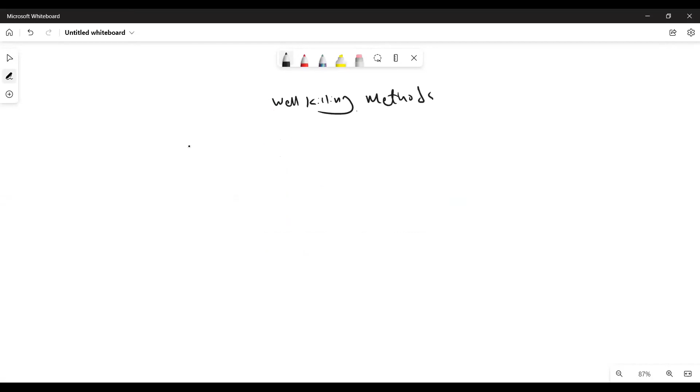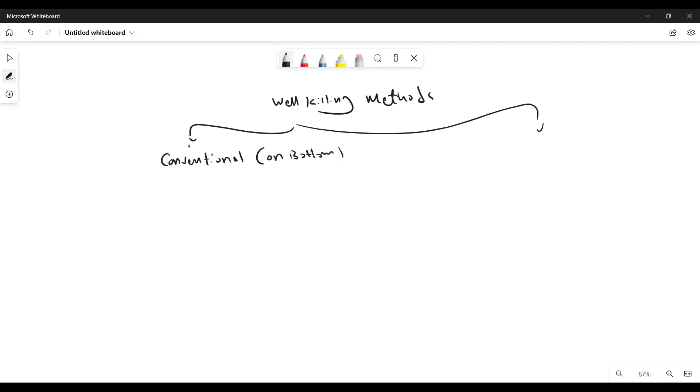Okay, so now guys, we're gonna talk about the well killing method or well control method. It's divided mainly into conventional or unconventional. Conventional means you are on bottom, and unconventional means you are off bottom.

Okay, so conventional methods like the driller method and wait and weight. And here unconventional, like the volumetric method.

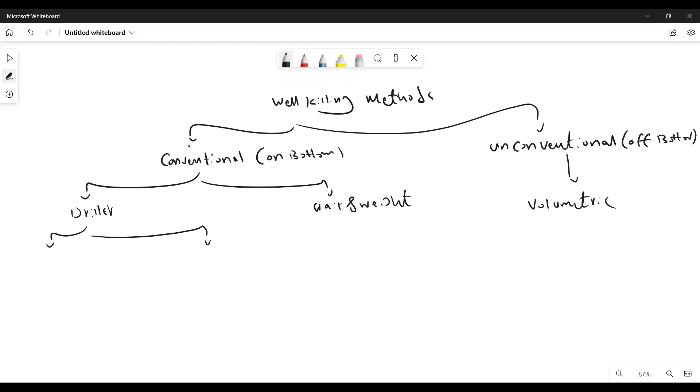So the driller method, guys, has 2 main circulations: first circulation, and second circulation. Here, wait and weight, only one single circulation. Okay, so let's talk in brief about them. For the driller method, first circulation, this one.

We have our well like this, with drill pipe, and the well is filled with original mud weight. While drilling, we have a kick. So we shut in our well and we need to start killing the well using the driller method.

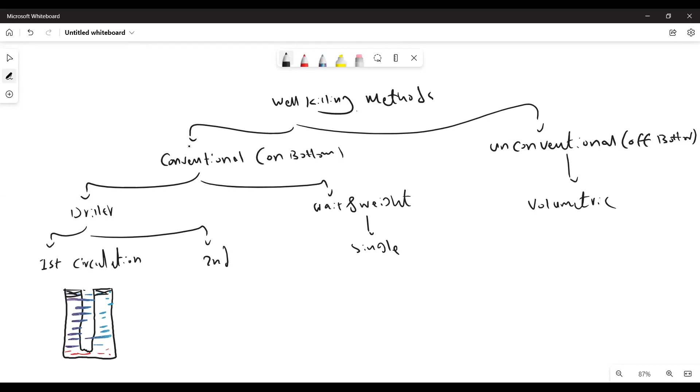Starting with the first circulation. The purpose of the first circulation of the driller method is to make displacement for this influx, pushing it out from the well by pumping original mud weight.

Once the influx is out from the well, and the well is completely filled with the original mud weight, we have successfully conducted the first circulation of the driller method.

Briefly for the second circulation: now we have our well like this, drill pipe, the well is closed, and once we conduct the first circulation, the well is completely filled with the original mud weight, no influx inside. So to kill the well, we need to pump kill mud weight. Let's go ahead and start pumping kill mud weight inside the well.

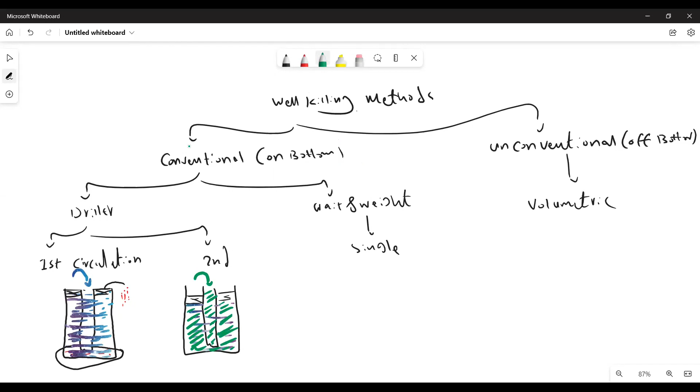Once the kill mud fills the well, making displacement for the original mud weight, the second circulation has been finished, and you're going to check for pressure.

You're going to find shut-in drill pipe pressure equals shut-in casing pressure equals zero. Here, once we finish the first circulation, we find shut-in drill pipe pressure equals shut-in casing pressure equals the original value of shut-in drill pipe pressure.

So again, the first circulation's purpose is to make displacement for the influx out from the well by pumping the original mud weight. Once finished successfully, we find shut-in drill pipe pressure equals shut-in casing pressure equals the original value of shut-in drill pipe pressure.

For the second circulation, you pump kill mud weight, making displacement for the original mud weight. Once the well is completely filled with the kill mud, you check for pressure: shut-in drill pipe pressure equals shut-in casing pressure equals zero.

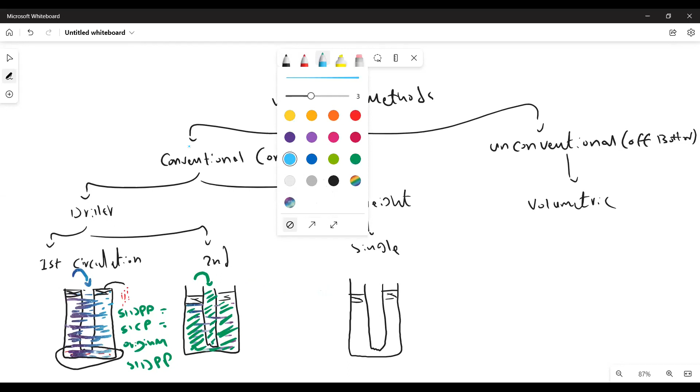So what about the wait and weight method? Now we have our well like this, drill pipe, the well is closed, the well was filled with the original mud weight like this, and we have some influx inside the well.

The purpose of the wait and weight method is to pump kill mud weight at one single circulation, making displacement for the influx and displacement for the original mud weight at the same time. Only one single circulation, not two like driller, and now your well is killed.

But with driller, you first need to displace the influx out from the well, then kill the well by pumping kill mud weight. With wait and weight, in one single circulation, you pump kill mud, making displacement for the influx and displacement for the original mud weight.

For the volumetric method, you are off bottom or have no pipe inside the well. For example, like this, no pipe inside the well. You close the BOP. You have influx inside the well like this, and here is your original mud weight.

The sequence or mechanism of the volumetric method is not included in our course, but we're going to discuss it briefly. The purpose is to allow this influx to reach the surface by a mechanism: allow it to expand by bleeding some mud, then allow it to expand, bleeding some mud again, repeating these steps while keeping bottom hole pressure.

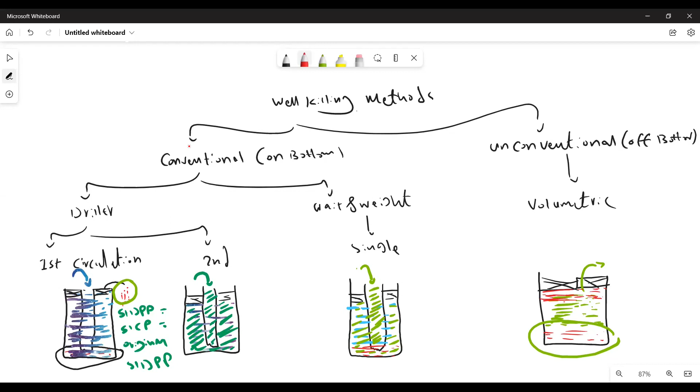Once the influx or gas reaches the surface, the volumetric method has been completed, and we're going to start the lubricate and bleed method, as we'll see later in our presentation. Now let's go ahead and talk in detail about our well control methods.

So here is our well, starting with the driller method, first circulation. Here is our well, like this, with drill pipe.

Here is our drill pipe. The well is closed. The well was filled with original mud, like this, while having some influx inside the well, like this.

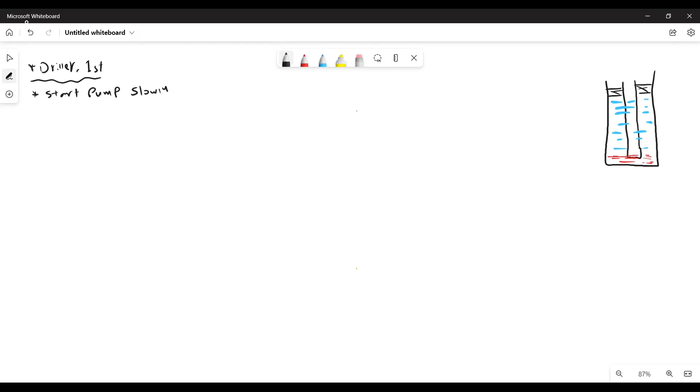Okay, so let's start with the driller method. First thing here is start pump slowly, 5 SPM by 5 SPM, while holding.

Okay, let's start pump slowly 5 SPM by 5 SPM till reaching kill rate, for example 30 SPM, while holding casing pressure constant. That's called correct startup procedure.

Okay, so anytime you need to start your killing operation, you need to run pump slowly 5 by 5 till reaching kill rate, okay, while holding casing pressure constant.

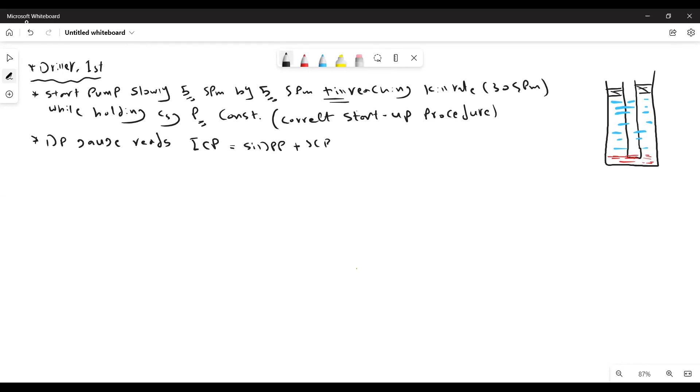Okay, so now once reaching kill rate 30 SPM, drill pipe gauge reads ICP value, equal shut-in drill pipe pressure plus SCR pressure. So now here, once reaching kill rate, now drill pipe gauge reads ICP value. Okay, so let's have a look now.

On the two sides, we have drill pipe side and we have annulus side. Drill pipe side has only one fluid, the original mud, but annulus side has two fluids, influx and original mud. So all the time we need to keep the one phase fluid pressure constant.

So now after drill pipe gauge reads ICP, let's continue pumping original mud, holding drill pipe pressure constant at ICP till the influx is out from the well. So we're gonna pump original mud weight till the influx is completely out from the well, and now the well is completely filled with the original mud.

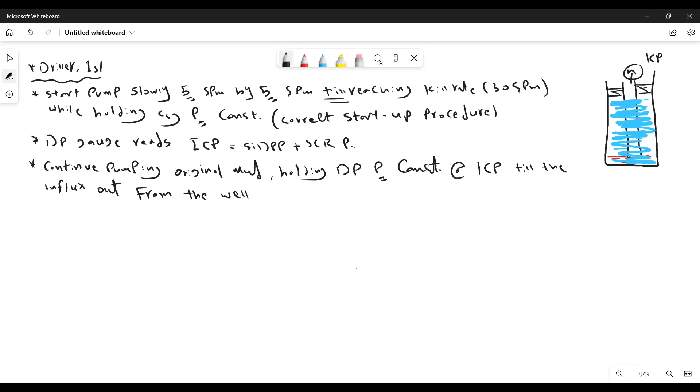No, I thought that the pump pressure should equal the casing shut-in pressure plus the SCR pressure. Again, what do you want? I thought that the pump pressure reads the previous shut-in drill pipe pressure plus... No, the SCR pressure. ICP equals shut-in drill pipe pressure plus SCR pressure. So what is the problem? We just calculated it in our kill sheet, right? Yeah, okay, so you have a problem with this calculation?

No. Okay, so here once reaching kill rate, for example 30 SPM, okay, drill pipe gauge will reach ICP value, shut-in drill pipe pressure plus SCR pressure or pump pressure, okay? Okay, or not complete?

Okay, then continue pumping the original mud, holding drill pipe pressure constant at ICP till influx is out from the well. Now shut down, pump slowly, 5 SPM by 5 SPM, while closing choke completely.

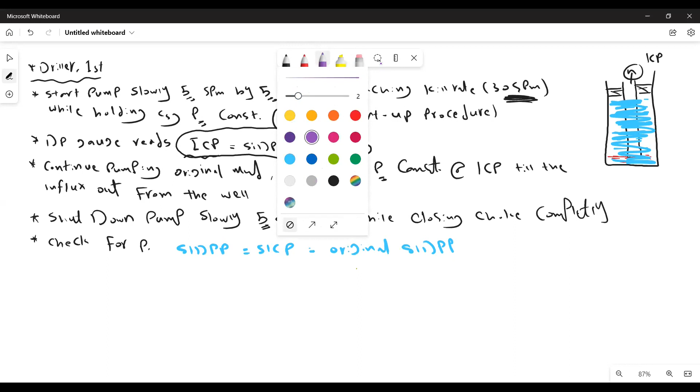So for example, if we have from the beginning shut-in drill pipe pressure is 350, shut-in casing pressure equal 400. So after conducting successfully the driller method circulation, we're gonna find shut-in drill pipe pressure equal shut-in casing pressure equal 350. Okay, so what will happen if we found shut-in drill pipe equal shut-in casing, but instead of 350 equal 450? What is the problem, guys? So we are over 100. Yes, say over. Yeah, so we may have something called trapped pressure.

Trapped pressure. So how to check for trapped pressure? Start bleeding, bleeding 50 psi. If no pressure build up, so that's trapped pressure. If there is pressure build up again to 450 and more, so there is influx inside the well - secondary influx or further influx.

Okay, so what will happen if we found shut-in drill pipe pressure, for example, equal 370, and shut-in casing pressure equal 430? So what is the problem? We still have another influx. Yes, okay, so now let's go ahead with the driller method second circulation.

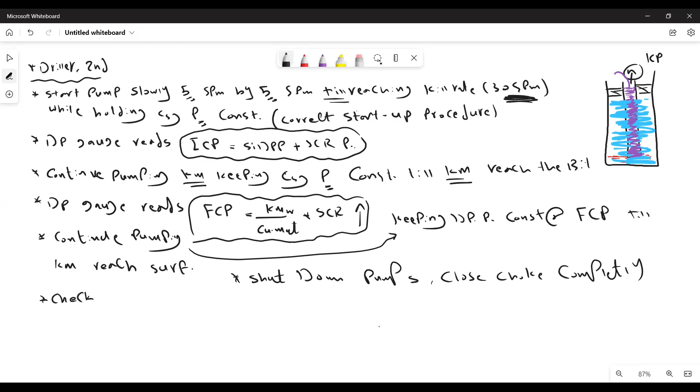Okay, close the choke completely. And the last thing is to check for pressure. After successfully conducting that, you're gonna find shut-in drill pipe pressure equal shut-in casing pressure equal 0.

Same thing if we found shut-in drill pipe equal shut-in casing, but instead of 0, 100 - so we may have trapped pressure. How to check for trapped pressure? By bleeding 50 psi. If bleeding 50 psi and no pressure build up, it's okay, it's trapped pressure. If pressure builds up again, the kill mud may not be sufficient enough.

Another case: if we found shut-in drill pipe pressure equal 0, but shut-in casing pressure equal a value, for example 70 psi, this means that the kill mud is not reaching the surface yet.

So this area still has original mud, and this causes a back pressure on the casing pressure. Once shut-in drill pipe is 0, this means kill mud already filled the drill pipe, but casing pressure has a value, meaning kill mud didn't reach the surface yet.

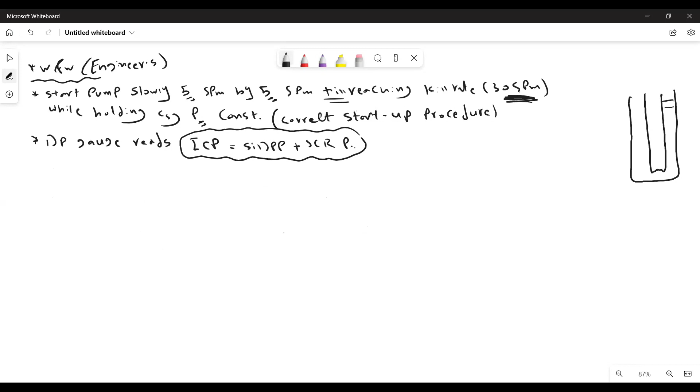Okay, so here is our well, the drill pipe. The well is closed. The well is lined up to the mud pump. The well was filled with original mud, like this,

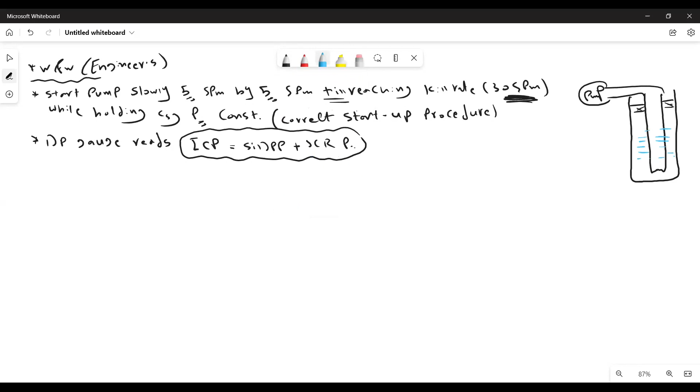while having some influx inside the well. So as mentioned, the wait and weight method is to make displacement for the original mud and for the influx at one single circulation. So here, to start the wait and weight method, same thing.

Start pump slowly, 5 SPM by 5 SPM, until reaching kill rate 30 SPM, for example, while holding casing pressure constant. This is called correct startup procedure. Once reaching kill rate, drill pipe gauge reads the ICP value.

Okay, so now here we're pumping kill mud inside the pipe. Once reaching kill rate, the drill pipe gauge reads ICP value. What else?

Once the surface line volume has been pumped, make 0 strokes - zero the stroke count. So once we pump the capacity of the surface line volume, we need to zero the strokes. Why? Because we're gonna follow the step down table. You're gonna see now.

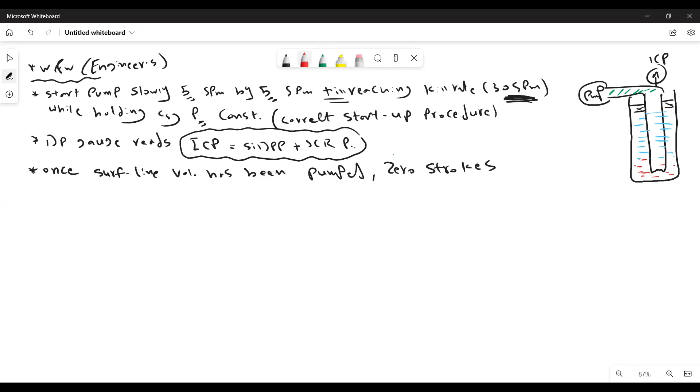Okay, so now we have some basic calculations you already know, let's mention them again. ICP equals shut-in drill pipe pressure plus SCR pressure. FCP equals kill mud weight over current mud weight times SCR pressure, and round up. And we have delta P, pressure drop per 100 strokes, equals ICP minus FCP over drill string volume in strokes, times 100, and round up.

Okay, so let's say our ICP is about 900, and our FCP is about 400, and our drill string volume is 800 strokes. So now, guys, after making this calculation, you're gonna have a look at the two sides, drill pipe side and annulus side. The annulus side has two fluids, influx and original mud. The drill pipe side has two fluids, kill mud just entering the well and original mud. So no single phase fluid - we can't keep pressure constant.

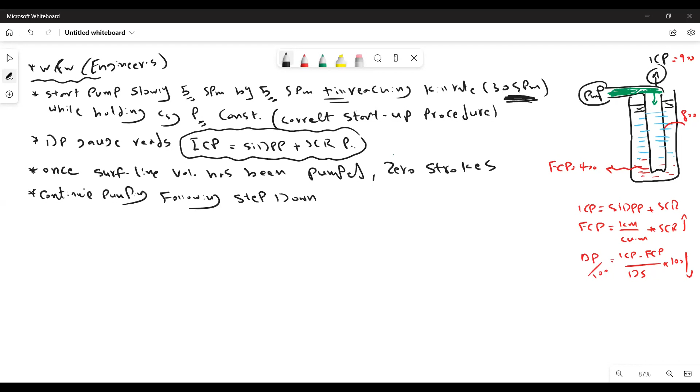So here we need to, as a second step, continue pumping following the step down table or step down graph - the step down table, or drill pipe pressure schedule, step down schedule, following the step down table for drill pipe pressure.

Okay, so let's make our calculation for delta P. Let's say our delta P, without calculating, is 50 psi after round up. Okay, so now let's make our step down table. Here is the number of strokes.

And here is drill pipe pressure. The number of strokes we're having here: 0 stroke, 100, 200, 300, till reaching the full capacity of the drill string, 800 strokes. We make 0 strokes once pumping the surface line capacity, and we have the pressure ICP on the drill pipe gauge. At 0 stroke, we have ICP value, let's say equal to 900 PSI.

By pumping 100 strokes, the pressure dropped by 50 PSI per 100 strokes. After pumping 100, it's 850. Then another 100, it's 800. Another 100, 750, till pumping the whole capacity of the drill string. So at 800 strokes, once the kill mud reaches the bit, we're having FCP value equal to 400 PSI. That's called the step down table or step down graph.

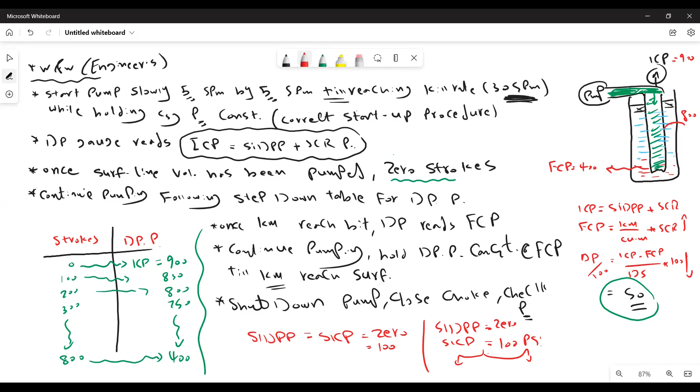Is it due to hole geometry or open volume? No, we may not have made re-zero for the stroke counter. If we ignore re-zeroing the stroke counter, or if we don't take the surface line volume into our calculation, at 0 stroke you have ICP. Once pumping the first 100 strokes, the surface line volume, say the surface line volume is 100 strokes, so after pumping 100 strokes you're going to keep 850. After 200 strokes, 800.

So here you didn't take the 100 strokes of surface line volume into your calculation. So after pumping the total calculated volume, the kill mud will reach this specific point, but still here, 100 strokes didn't reach the surface before reaching the surface. Where does this 100 strokes come from? Because you're pumping the surface line volume and didn't zero the stroke counter.

This one you can control. But if the well has washout or something, this one you cannot control. Also, maybe you have more annular volume if you have an error in your calculation or washout in the formation, yes. But you can control the situation.

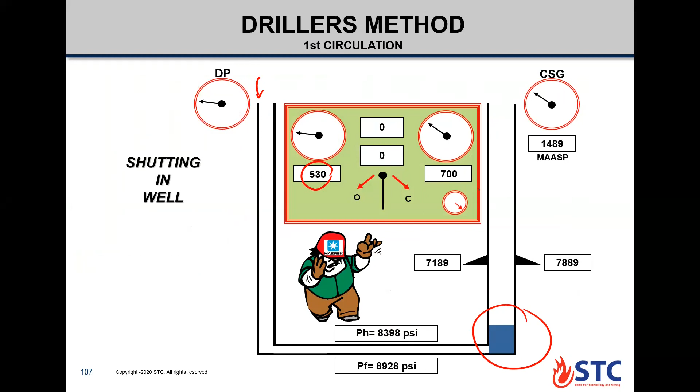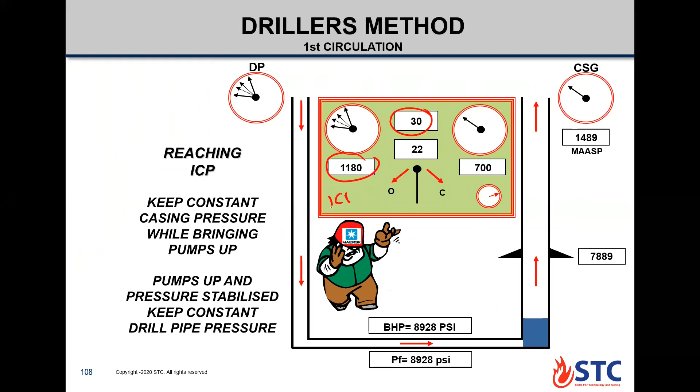Starting with shut-in drill pipe 530, shut-in casing about 700 psi. So here, going to pump. First thing, reaching 30 SPM, so drill pipe gauge reads ICP value. Keep pumping the original mud weight, making the displacement for the influx. If you look here, the casing shut-in pressure will be maximum when the top of the influx reaches here.

So here, once the influx reaches the top, maximum casing shut-in pressure. We're going to complete pumping, keeping the drill pipe pressure constant at ICP, till the influx is now at the top. Now the influx is out, keeping ICP value. Once the influx is out of the well, casing pressure will equal the original shut-in drill pipe pressure. Once we shut down the pump, shut-in drill pipe pressure shut down equals shut-in casing pressure, both equal to 530, the original value of shut-in drill pipe.

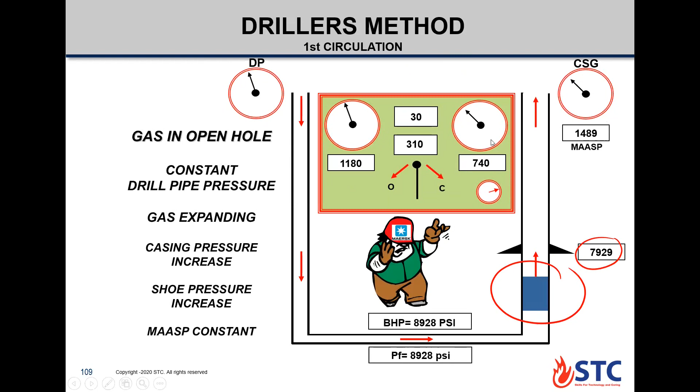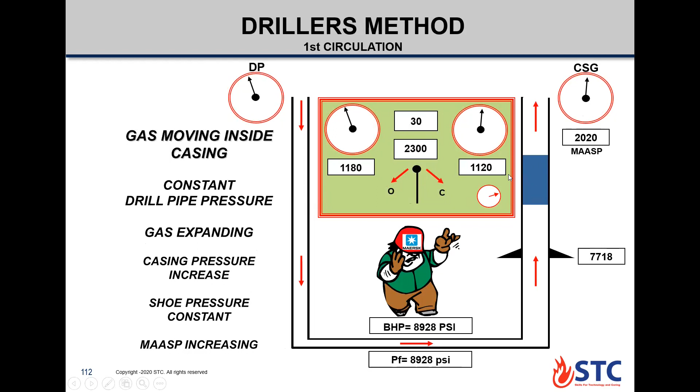But look here, once we are in the open hole, our eyes are on the MAASP, not to allow casing pressure to reach the MAASP, not to fracture the formation. Once you are inside the casing string, so it's okay, no fracturing of the formation.

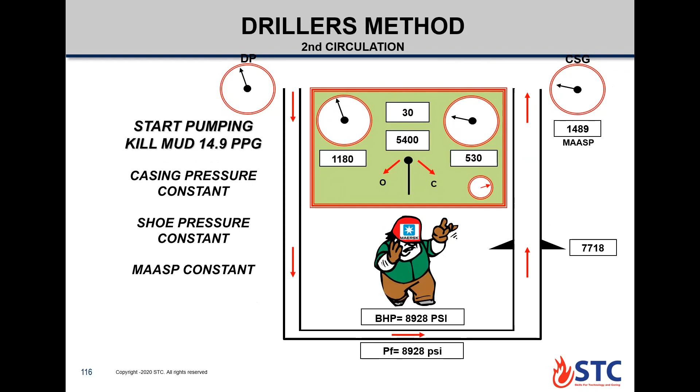Now to talk about the second circulation of the driller method. Look here, the well is completely filled with the original mud. The pump is running at rate, so here we have ICP. Now we're going to pump kill mud. We have two fluids here in the drill pipe, so we need to keep casing pressure constant at 530 till kill mud reaches the bit.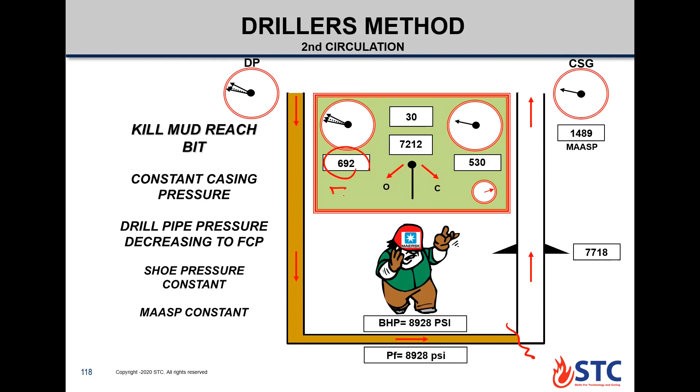Now kill mud reaches the bit, so drill pipe gauge reads FCP value. We need to keep FCP value constant till kill mud reaches the surface. Once kill mud reaches the surface, casing pressure equals 0. Once we shut down the pump, drill pipe pressure also equals 0.

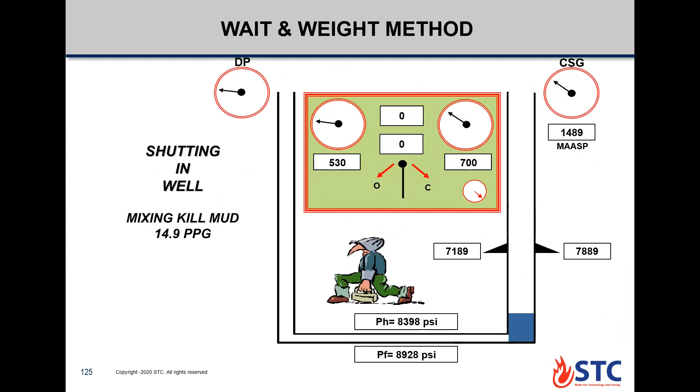So coming to talk about wait and weight method. Here we have influx inside the well. So two fluids here, and the drill pipe, once we pump kill mud, we have two fluids. So no one phase side to keep its pressure constant. So we're gonna follow a pressure schedule, step down pressure schedule.

Once pumping kill mud, drill pipe pressure will decrease till reaching the final circulating pressure, 692. Look here, drill pipe pressure decreases till kill mud reaches the bit. Now we having the FCP value, so we're gonna keep the FCP value constant on the drill pipe gauge till kill mud reaching to the surface.

And same thing, as long as the influx is in the open hole, we need to keep our eyes focused on the casing pressure, not to reach the max and fracture the formation. Now kill mud reaching the surface, so casing pressure equals 0. And once you shut down the pump, you're gonna find your drill pipe gauge equal 0 also.

So during killing the well, guys, and circulating the influx out from the well, we may face some challenges or problems, like choke washout, choke plugging, hole in the string, loss circulation, nozzle blown out, nozzle plug, or pump failure. So your first action, if you face any of these problems, is to secure the well, shut in the well, evaluate or assess the situation, then take proper action.

So let's know how to identify these problems. First thing, if we have choke washout, you're gonna find sudden decrease in casing pressure, then following after a lag time, drill pipe pressure decreases. So how much is the lagging time between the change in casing and drill pipe?

If we have our well like this, and the choke is here, so once you open or close the choke, the casing pressure immediately changes. Immediate change, okay? Then drill pipe gauge has a lagging time. After some time, drill pipe shows the same change, okay? So what is the lag time?

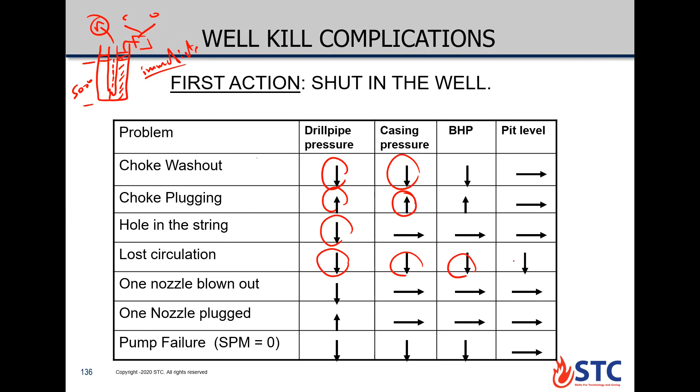Okay, if we have a choke plugging, we're gonna find a sudden jump or sudden increase in casing pressure, then after lag time followed by drill pipe pressure increase. If we have hole in the string, only drill pipe pressure is affected, it decreases, and all other parameters stay the same. If lost circulation, you're gonna notice drill pipe pressure decrease, casing decrease, bottom hole pressure decrease, and pit level also decrease. This one identifies lost circulation.

Sorry, what does it mean, hole in string? Washout in the string, hole in string. Washout. Okay, yeah.

Then if we have a nozzle blown out, your drill pipe pressure decreases, but casing not changed, bottom hole pressure not changed, and pit level also not changed. If we have nozzle plugged, sudden jump in drill pipe pressure, all other parameters stay constant. If we have pump failure, you're gonna find your SPM is 0, pump rate is 0, then drill pipe pressure decreases, casing decreases, bottom hole decreases, but pit level stays the same.

Okay, sorry, about the washout, if we have washout, washout in choke or pipe? Washout in the pipe. Okay. So the bottom hole pressure will decrease, eh? Decrease? No, not affected, only drill pipe pressure decreases. No, because the friction loss, we now have different friction loss.

Friction loss in the annulus or the drill pipe? In the annulus and in the drill pipe, both. Yes, but not affected too much. Not affected too much due to partial washout in the drill pipe.

Okay, so now to talk about the volumetric method. The volumetric method is not involved in our course in details. It requires some time, much time, to conduct it successfully.

First, let's talk about the cases where we use the volumetric method. If our pipe is off bottom, or if we can't make circulation - for example, the drill string is plugged, or the bit is completely plugged, or the drill string is completely out from the well, washout in the drill string, or cut in the drill string. The drill string has been cut and left in the hole, so we need to remove the gas first, then start fishing operation. Or if we have equipment failure like pumps or motors.

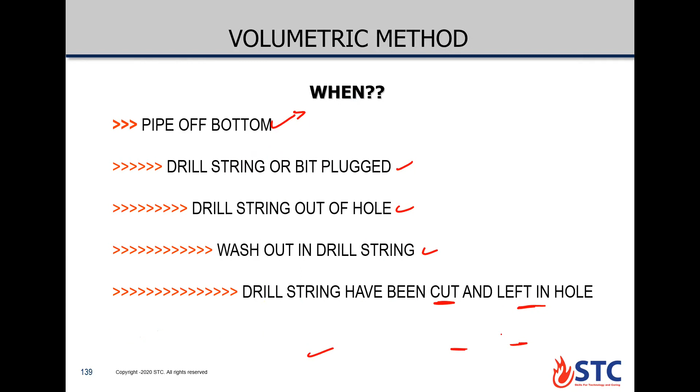So what is the volumetric method itself? If we are off bottom or we have plugging and we can't get the influx and circulate it out, that's the situation to use the volumetric method. The volumetric method is to allow gas to expand till reaching the surface by bleeding an amount of mud from the choke, while holding bottom hole pressure constant.

So the first thing you're going to do is allow the gas to migrate. You have now 100 psi additional - keep it as a safety margin, then allow another 100 psi as a working margin. Then you start bleeding an amount of the mud.

So now gas expands and casing pressure starts to increase. Then you bleed another amount of mud, and casing pressure starts to increase again. You keep making this operation more and more until the gas reaches the surface. This volumetric method takes much time to be conducted successfully.

You need to keep bottom hole pressure constant, or nearly constant, all the time, by controlling drill pipe pressure if it exists. Casing pressure is allowed to increase to compensate for the mud bled. Once you bleed mud, casing pressure starts to increase to keep your bottom hole pressure constant. So casing pressure is allowed to increase to compensate for mud bled from the well, until gas is at the surface.

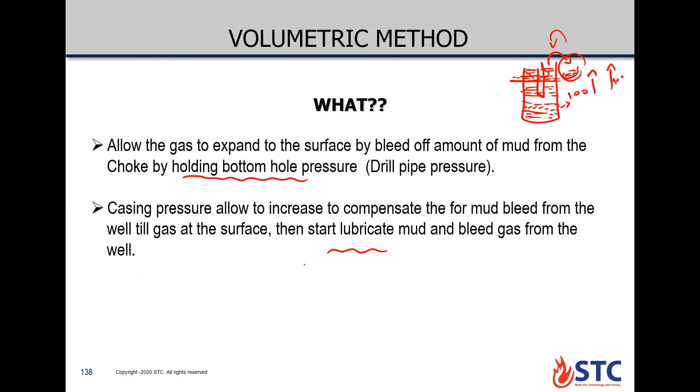Then we're going to start the lubricate and bleed method. So what about the lubricate and bleed method? Here we have no pipe inside the well, and we allow the gas to reach the surface. Lubricate and bleed is a closed loop, or a closed system. We bleed some gas from the choke, and at the same time we pump kill mud.

The same sequence we make in the volumetric method: bleeding 100 psi equivalent of mud volume, and letting the casing pressure increase by 100 psi, repeating this step more times until the gas reaches the surface. Here it's vice versa - start pumping kill mud inside the well, allowing the bottom hole pressure to have 100 additional psi, then remove gas equivalent to this 100 psi.

Then put another 100 psi of kill mud inside the well, then make the removal again. Repeat this step more and more until the influx is completely out from the well and the well is killed - kill mud now completely fills the well.

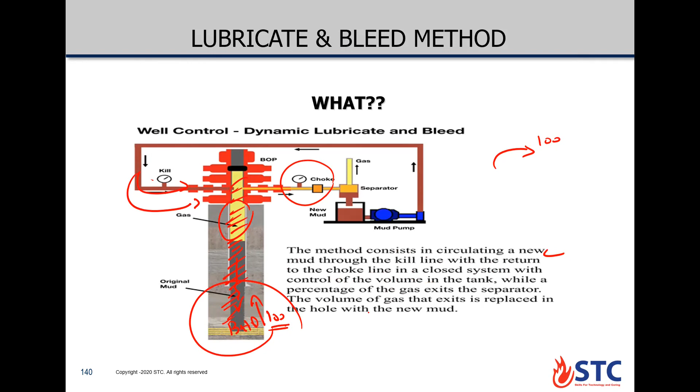This method consists of circulating new mud through the kill line with return to the choke line in a closed system, with control of the volume of the tank while a percentage of gas exits the separator. The volume of gas that exits is replaced in the hole with new kill mud.

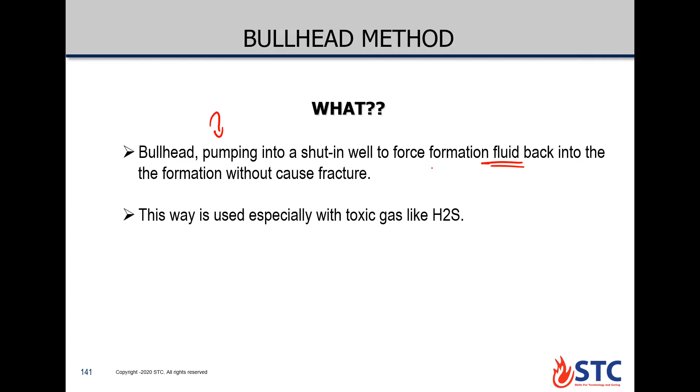There is another method called the bullhead method, used for well intervention jobs, especially if there is toxic gas like H2S. Bullheading is pumping into a shut-in well to force formation fluids back again into the formation without causing any fracturing. This way is used especially with toxic gas like H2S.

For stripping operation - if, for example, we are pulling out of the well and we have an influx, we need to make a stripping operation to get below the influx to circulate it out from the well. So stripping operation is running the pipe into a shut-in well to get the drill string below the influx and circulate it out.

So how do we make a stripping operation? First, for example, if we are pulling out of the well and we have influx, as mentioned earlier, we have a flow, so we need to install the drill pipe safety valve or full opening safety valve in open position, then close it by a wrench. Now the safety valve, or full opening safety valve, is closed. Then install the IBOP in open position.

Then remove the screw, the locking screw. So now the IBOP in closed position. Full opening safety valve in closed position. Back again, and open the safety valve. So now the lineup: IBOP in closed position, drill pipe safety valve in open position.

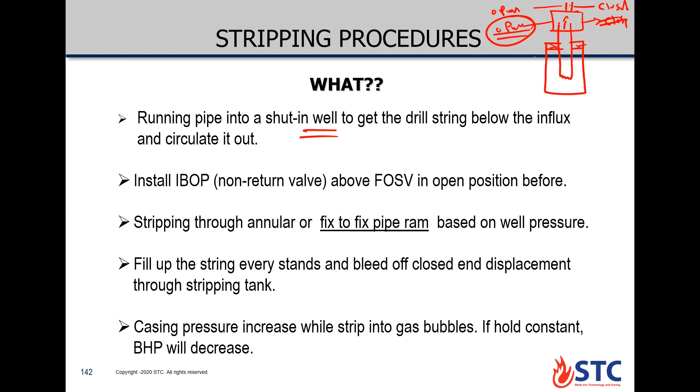Then we can go ahead and make our stripping operation. Stripping operation can only be conducted from annular to fixed RAM, or from fixed RAM to fixed RAM, but we cannot make it from variable RAM.

So if our BOP stack has annular, then variable, then shear blind, then fixed RAM, we can only make stripping from annular to fixed, not from variable to fixed. If we have fixed, we have two options: from fixed RAM to fixed RAM, or from annular to fixed RAM.

While doing the stripping operation, you need to fill the string every stand and bleed off closed-end displacement as you run in the well. So fill up from the surface every stand and bleed off closed-end displacement.

If we have some gas or influx here with height h small, once you strip into this influx, its height will increase. So once the height increases, the reduction in hydrostatic pressure will increase, and the casing pressure will be allowed to increase while stripping into the gas bubble.

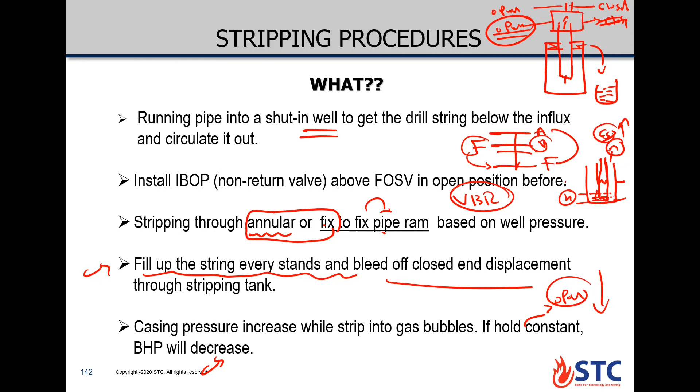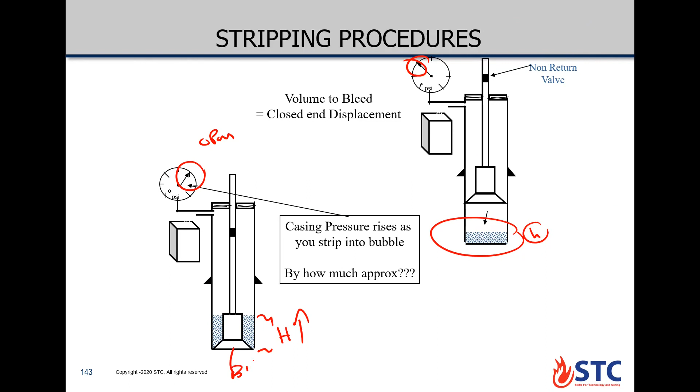If you keep it constant, meaning you open the choke to decrease the casing pressure back to the original value, then bottom hole pressure will decrease. Once you strip into a gas bubble with small height h, once stripping, the height of the influx gets larger, so casing pressure increases. If you keep it constant to this value, you open the choke, which means you make a reduction in bottom hole pressure, so you're going to have further influx.

Now to talk about formation ballooning. If you look at this figure, once the pump is on, we have an APL effect, so you may apply more overbalance, and some fluids will go into the pore space. Your bottom hole pressure is now slightly greater than the induced fracture pressure. Once your pump is off, formation fluids will come back again as we lose the effect of APL.

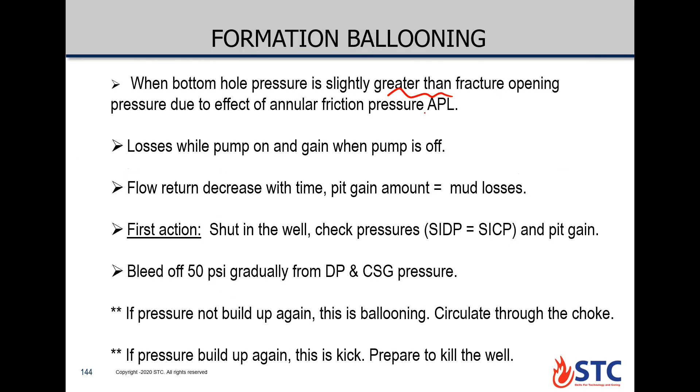So let's go back again here. When bottom hole pressure is slightly greater than the fracture opening pressure due to the effect of annular pressure loss, APL: losses occur while pump is on, and gain occurs when pump is off. Returns decrease with time, and pit gain amount equals mud loss. So the first action is to shut in the well and check pressure.

You're going to find shut-in drill pipe equals shut-in casing pressure, so you need to bleed 50 by 50 from drill pipe and casing. If there is no pressure build-up, that's ballooning, and you need to circulate bottom up through the choke, in case a small amount of gas needs to come out without reducing hydrostatic pressure. If there is pressure build-up again, that's a kick, and you need to prepare to kill the well. That's formation ballooning.

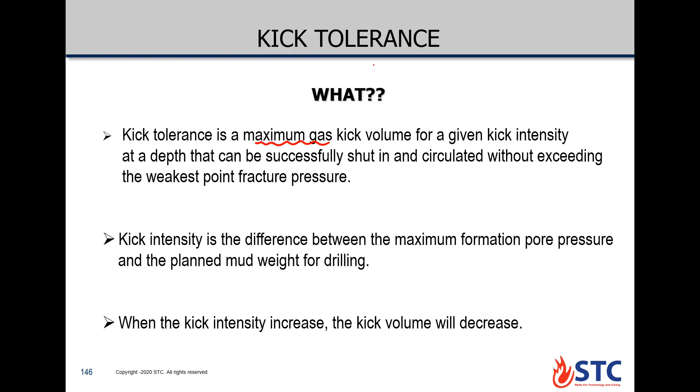Now to talk about something called kick tolerance. What is kick tolerance? Simply, kick tolerance is the maximum amount of gas, the maximum volume of kick, you can successfully take as a kick and circulate it out from the well without fracturing the formation at the weak spot.

Kick tolerance is the maximum volume of a kick for a given kick intensity at a given depth that can be successfully shut in and circulated without exceeding the weakest point fracture pressure. So what is kick intensity? Kick intensity is the difference between the maximum pore pressure and the planned mud weight.

For example, if our formation pressure is equivalent to, let's say, 10 ppg, we're going to use hydrostatic pressure equivalent to, let's say, 11 ppg. The maximum expected pore pressure, or the abnormal pore pressure we may face, is about, let's say, 14 ppg. So now kick intensity is the difference between the maximum pore pressure, the abnormal pressure we may face, and the planned mud weight. So the difference is 3 ppg.

Once the kick intensity increased, the kick volume will decrease, as long as the difference between the maximum allowable pore pressure and the hydrostatic pressure is increased. So the kick volume you can take and circulate decreases. Once the difference between the maximum pore pressure and the hydrostatic decreased, your kick volume will be increased.

So there is good practice to deal with top hole formation. First, drill a pilot hole starting with a small diameter, then ream and increase the diameter. Use the diverter all the time to divert any gas or influx away from the rig. Control the rate of penetration to minimize the cuttings, as cuttings may act as an increase in mud weight and cause fracturing of the formation.

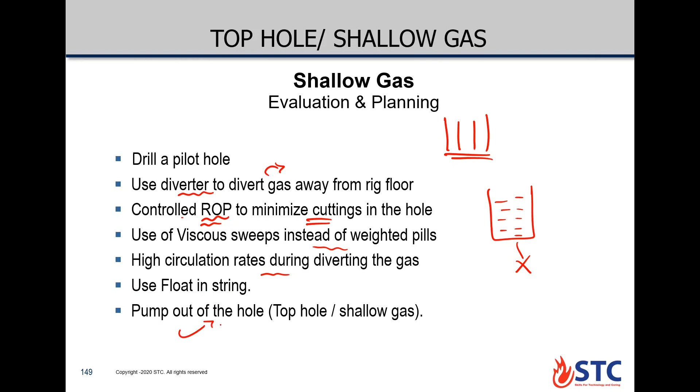Use viscous sweeps instead of weighted pills. Use high circulation rate while diverting the gas. Use a float in the string to prevent any backflow, and pump out of the hole at all times.

Now talking about gas hydrates: these are like ice or solid molecules that may form in the flow line, causing plugging so fluid cannot pass through. Gas hydrates only form in the presence of these parameters together: relatively high pressure, relatively low temperature, water, and hydrocarbon gas. If we eliminate any of these parameters, no gas hydrates can form. Let's talk about what to do if gas hydrates are already formed.

To solve this problem, reduce pressure if possible, since hydrates form at high pressure; reducing pressure eliminates that factor. Raise the temperature, since hydrates form at low temperature; this eliminates the low temperature factor. If it's already formed, you can use injections like methanol, glycol, or salt water to remove the hydrates.

For most surface well intervention pressure control equipment testing, a ratio of methanol or glycol is used to prevent gas hydrate formation while making the pressure test.

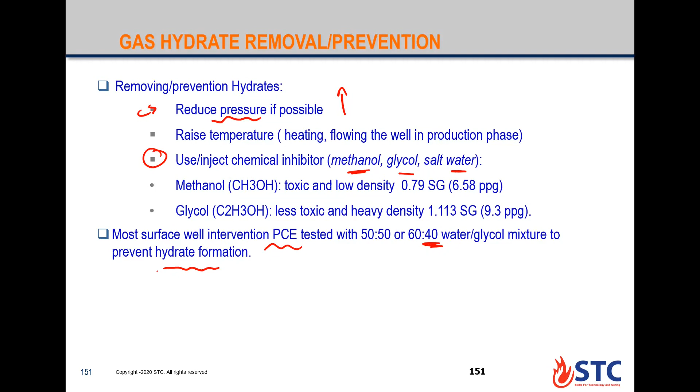My last point here for PMP is about safety drills for training. We have different drills: pit drill, trip drill, choke drill, diverter drill, and BOP drill. All of these drills ensure the crew can effectively recognize and deal with different situations and react to a kick properly.

For example, in a drilling or tripping drill, you simulate an influx and observe the crew's response before shutting the well completely. You let them know it's a drill, so it's okay, and we can go ahead and resume operations.

For example, we have a diverter drill to ensure the crew can divert gas away from the rig successfully. We also have a choke drill to understand how the choke reacts during a kill operation, how to open and close it, how to read casing pressure and drill pipe pressure, and what the lagging time is. That's all for the drills and training conducted at the oil field or rig site.

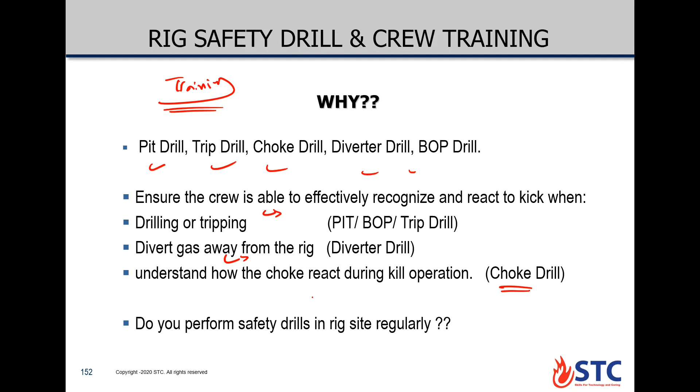And now, guys, we just finished our first part, PMP, principles and procedures.

Any questions on this part?

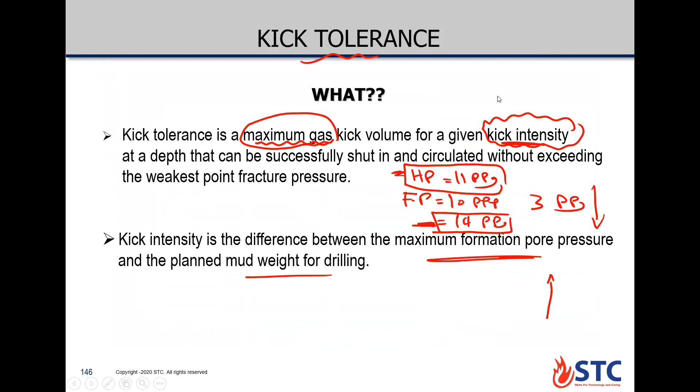One question please. Earlier in the wait and weight method, you told us that if there is a shut-in drill pipe pressure of 0 and shut-in casing pressure of 100 psi, there are two cases. One if we didn't reset the strokes. The second one, what?

There are two reasons, but both relate to the kill mud not reaching the surface. One is you didn't zero the stroke counter. Second is, as you mentioned, if there is an error in calculation or there is washout in the hole. So both are related to kill mud not reaching the surface.

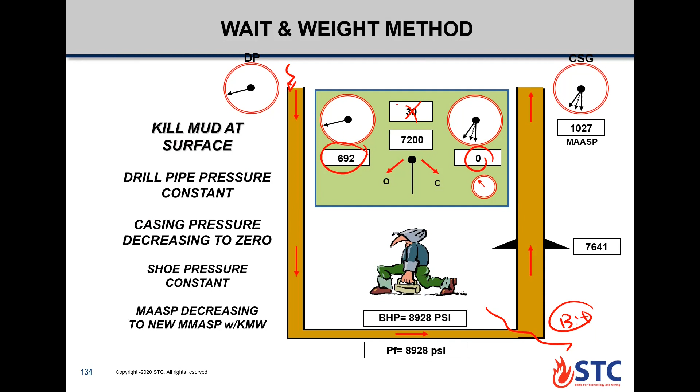So it's dependent on the kill mud volume. How do you know? You can identify after pumping the drill pipe capacity, like this. You can identify from this point. Once you're reaching the drill pipe, okay, to the bit. Once kill mud reaches the bit, or you think you've pumped the drill string volume, you need to shut down the pump. Once you shut down the pump, you're gonna find 0. Look here, yeah, till this stage.

Once you think you've pumped 1812 strokes, you need to make a flow check. Stop pumping and check for pressures. If you find 0 on the drill pipe gauge, you're okay. But if you still find pressure there, for example 100 psi or something like this, you didn't take the surface volume into consideration, or your kill mud is not sufficient enough.

But if the kill mud is not sufficient enough, won't the casing pressure and drill pipe pressure also increase? Yes, it will increase. I mean here we still have 100 psi - in the drill pipe. In the drill pipe also, if the mud is not sufficient, the drill pipe pressure will increase also, will not get 0. Yes, I write here 100 psi, 100 psi.

Once we thought we were pumping the drill string capacity, if we found 100 psi, this may be for two reasons. We may not have re-zeroed for strokes once the surface line has been pumped, or the kill mud is not sufficient enough. So how to check: complete pumping another 100 strokes of surface line volume. If after pumping 100 strokes or a little bit larger you find zero on the drill pipe, the kill mud is okay, and you ignore the surface line volume. But if there's still pressure on the drill pipe, your kill mud is not sufficient, and you need to prepare proper kill mud, then resume your operation.

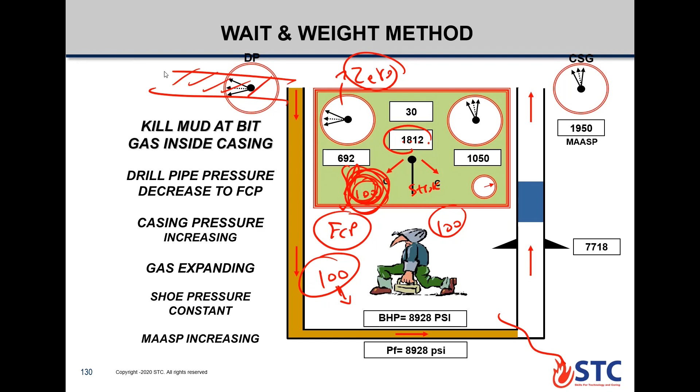Okay, any other problem before finishing? Also about gas hydrates - will we face this in the open hole or in the flow lines only? For example, at the choke line, for the flow lines.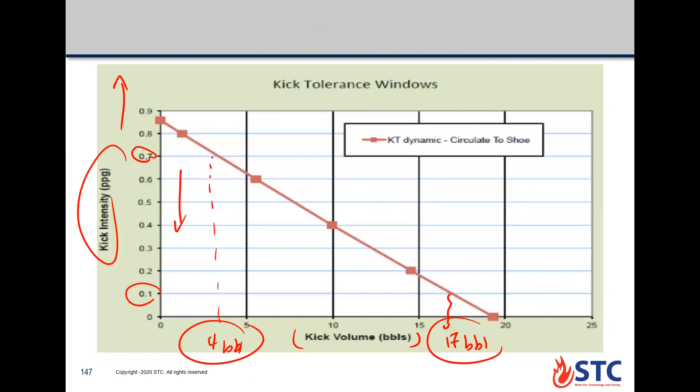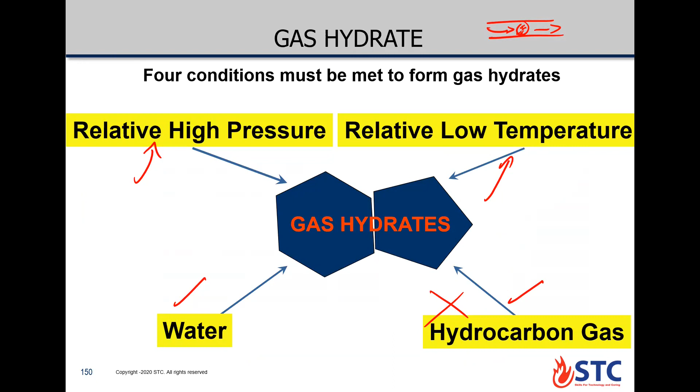Okay, any other problem for BOP? I would like to ask how to calculate or determine the kill rate. How to calculate the kill rate? The kill rate, killing speed. The kill rate will not be calculated. The kill rate will be given.

If you just remember the SCR pressures - SCR pressure is just like the kill rate. For example, let me go back again. Here, SCR pressure, why do we record it, or what is the purpose of SCR? SCR pressure is the kill rate, the recorded slow circulating pump rate, only used while circulating out a kick.

So just to remind you, we mentioned for SCR pressure we have two pumps, pump number 1 and pump number 2. We need to take slow rates, as we don't circulate the influx with a high rate. So at 30 SPM for example, and 40 SPM. At 30 SPM we need to record the pressure from pump number 1 from the remote choke, for example 200, and here at 40 SPM, 300. Then shut down pump number 1, go ahead with pump number 2, same, 200, 300. So we have two pumps with the same efficiency, one pump is backup for the second. We have here two rates.

The two rates - because if we use, for example, 40 SPM, and we find that the mud gas separator can't handle the amount of gas, we need to shut in the well, secure the well, and go ahead with the second rate, the slow rate, so the mud gas separator can handle the amount of gas inside it. So the kill rate is not calculated, it is given, and you have a pressure - pump pressure used as SCR pressure or dynamic pressure - you use for calculating ICP and FCP. Okay?

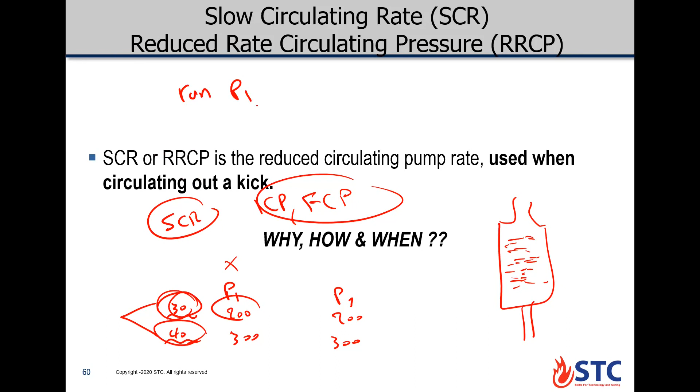No, not by experience. You actually run pump number 1 during drilling operation at 30 SPM, and wait for the drill pipe pressure to stabilize and record that - not by experience. Then raise the pump rate to 40 SPM, 5 by 5, and record another drill pipe pressure.

Then shut down pump number 1, and run pump number 2 at 30 SPM, record the pressure. Then raise to 40 SPM and record the pressure. So it is not by experience - you need to record it actually.

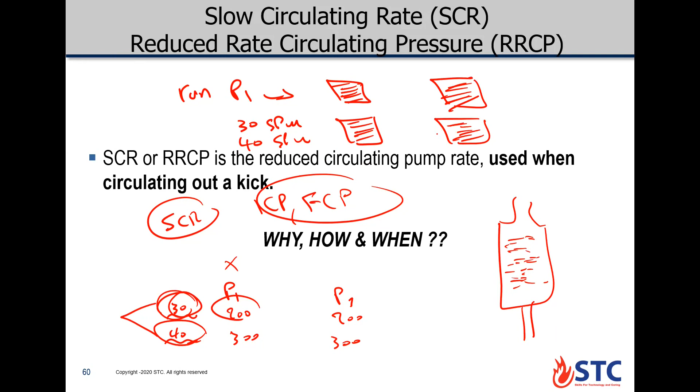Every case, like here, you need to record the SCR at the beginning of every shift. Once a shift has ended and another shift comes, you need to record - start pump number 1, 30 SPM, 40 SPM, record for both pumps.

If there is mud properties change, bit nozzle changed, BHA, or if you drill more than 500 feet, you need to record a new SCR pressure.

Yes, about the pressure I am clear, but my question was about the rate. You choose 30 or 40 - by default those should be 30 and 40. We need to record that between 20 and 50 SPM - this rate is by experience, 20 and 50 SPM, yes.

Great, it was okay. Thank you very much. Okay, you're welcome.

So if we are circulating any influx and the influx stays in the open hole, and we see that we may reach the MASP, what do we have to do? We're still in the open hole.

Okay, you have many options. First thing is to open the choke more. This will get another influx, no? No problem, but not to frac the formation.

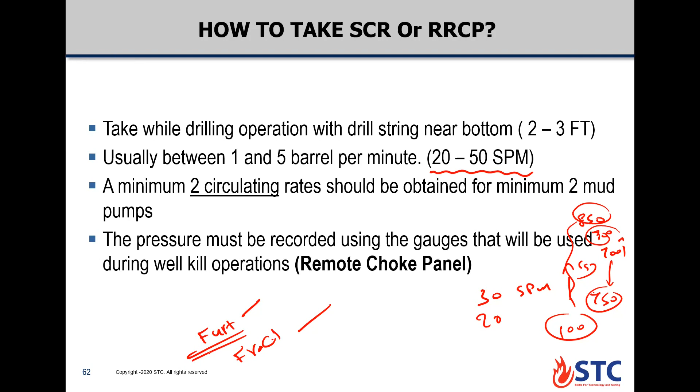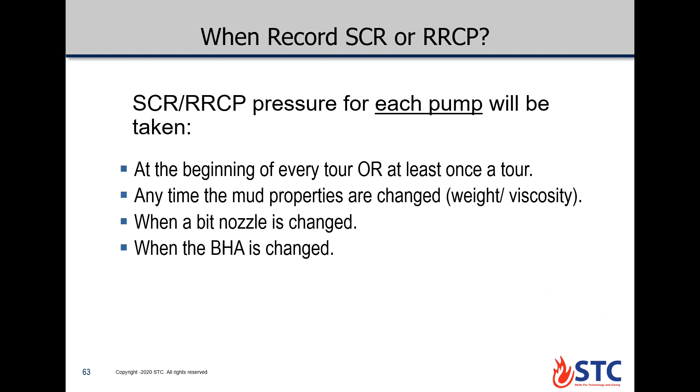But let me tell you something, because while you are reaching the MASP, because we have a big influx - if we get another influx, how can we control it later? Yes, okay, I got your point, but that's a bad practice. That's bad practice.

Let me remind you with this slide. There is bad practice that may lead to exceeding the MAASP. All of these situations, you may exceed the MAASP and fracture the formation. So fracturing the formation is an option if you have bad practice - not shutting in the well quickly, so you have a larger kick size, and you can frag the formation.

If you have bad practice, for example, closing the choke more and more while pumping, your fracture - if you didn't open the choke or open the HCR while pumping, you fracture the formation. During the simulator, if you as a supervisor frag the formation at any time, you will have immediate failure.

So fracturing the formation is an option. I'm not telling you that all the time you can control the situation - no, sometimes you may fracture the formation.

So once following the proper instructions, you will not reach the MAASP, and your eyes are all the time between casing pressure and MAASP, so it's okay. But if you did a stupid action - sorry, I don't mean you - if the one who is on the pump, on the BOP, on the choke, has a stupid action, it's called bad practicing, like this, bad practicing.

So he may make bad practice leading to a big problem, and the result will be fracturing the formation.

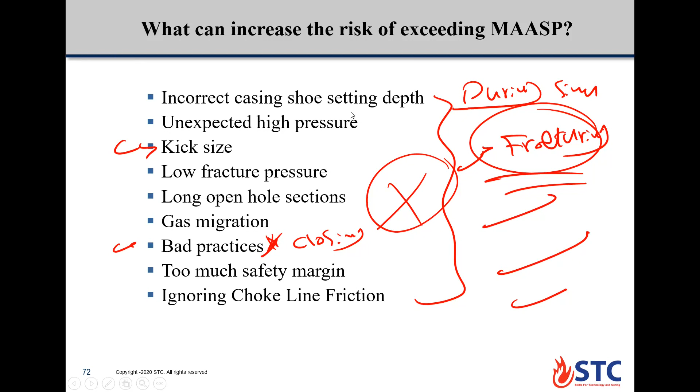Okay, so any question else? Any question else regarding this point? Hey guys. No. Okay, so let's finish this one.